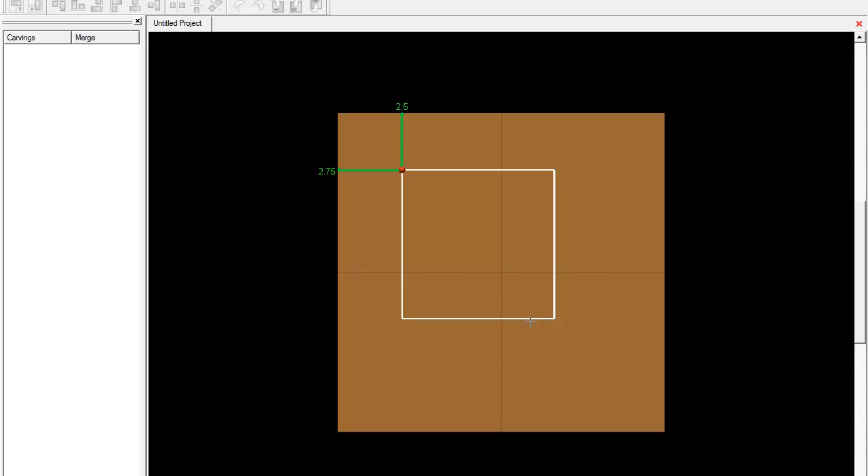The wood grain makes it easier to see if I take the wood grain off. Basically I have a square here. I'm going to come up and choose the square tool, and drag me a square here on the board, clicking somewhere in the middle and centering both directions.

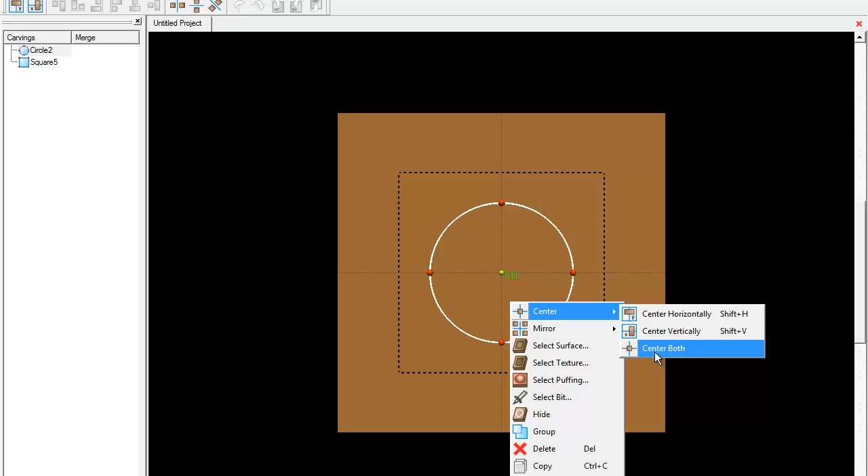Now I'm going to come back and do a circle, clicking here in the middle, pull it out to about the size I want. Here again, center it in both directions.

Coming back to the square, going to move up and do the sweep surface, and I'm in demo mode here because I do not own the software. I've got this expanded here so I can see it better. Going to enlarge it, put a grid on it so I can see the grid.

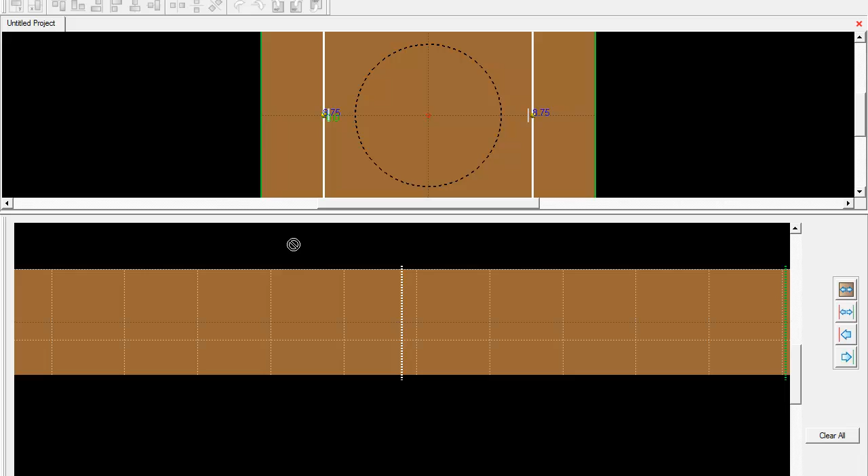Basically I'm going to use just straight lines, line segments, and draw 3 lines, going across here, up, and then up again. So I'll start with the first line, bring it out, right about there would be fine. Do another line segment.

Notice whenever I get near this node right here, this star on it, that means I'm going to connect them. I'm going to pull it out to right about here, and one more line to go up.

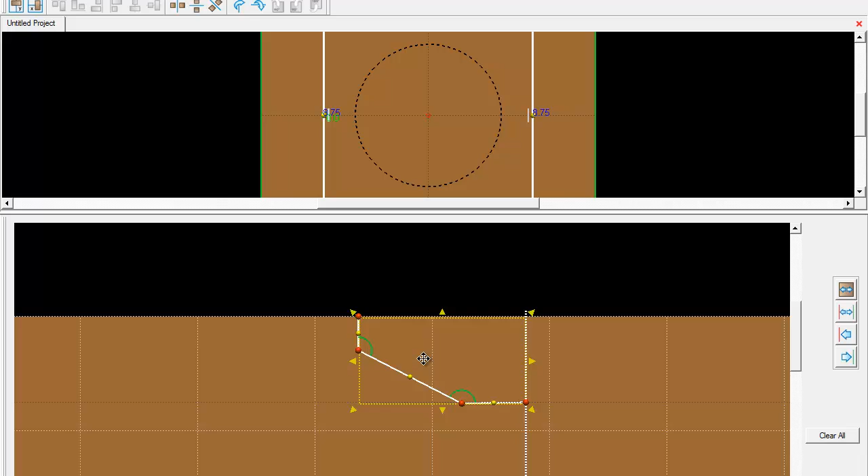Get it up close to the top of the board. Now what I find is that I have a problem with this, that it doesn't come about just right, so I may have to play with it here a little bit.

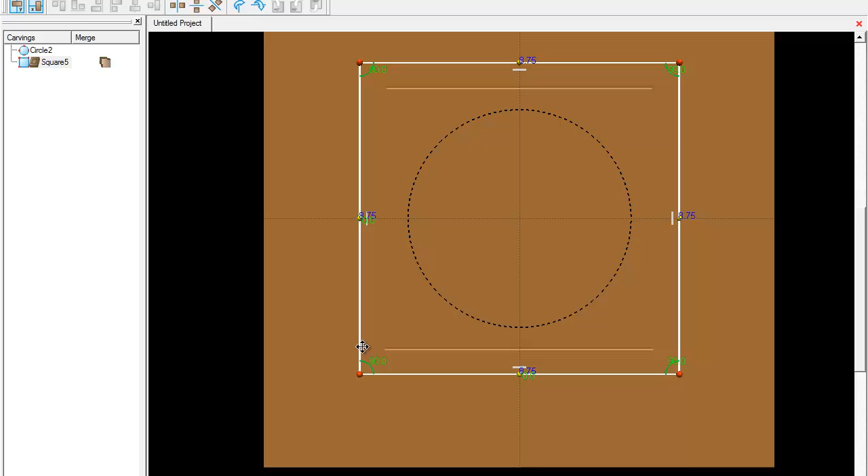See what it gave me here was a line that gave me the profile, but way inside of where I wanted it to be. Here's the line, the white line here, and just a small, maybe 1/8 of an inch.

I go back into it, turn the grid on. You can see I'm much more than even 1/2 an inch here, not just 1/8 of an inch.

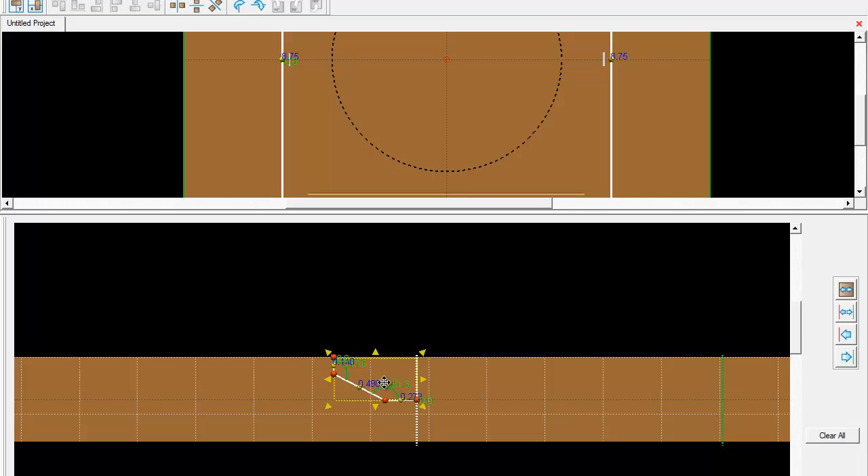What it seems to be, it has something to do with this line right here. If I make it a little bit crooked, click on OK. Now it worked. Okay, it usually takes me 3 or 4 tries to get this to come out right.

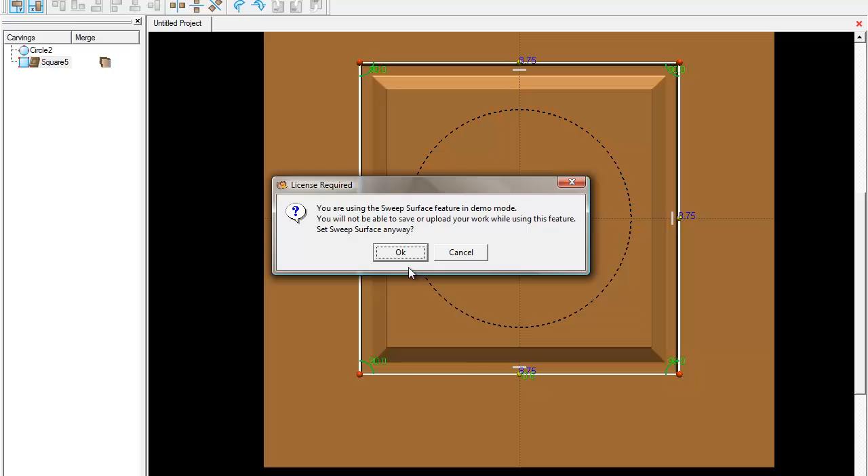Go back into it. Now I can make it the profile I want. Put my cursor on the straight line here. Right mouse click, click on Form, click on Arc.

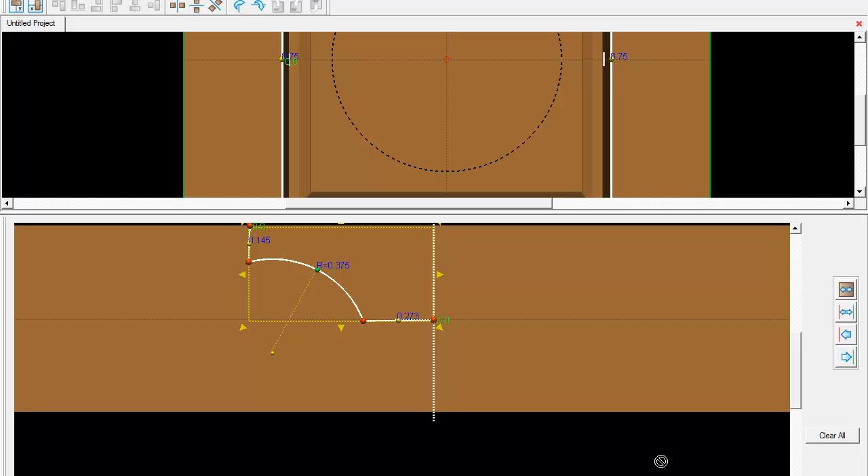And you can see I've got an arc on there now, so I'm going to bring the arc up to what I want. Now I'm going to click on OK. And there we go, we got the profile we want around the outside of the board.

The square is done, so let's move on to the circle. The circle consists of 3 inner circles and a half ball in the middle.

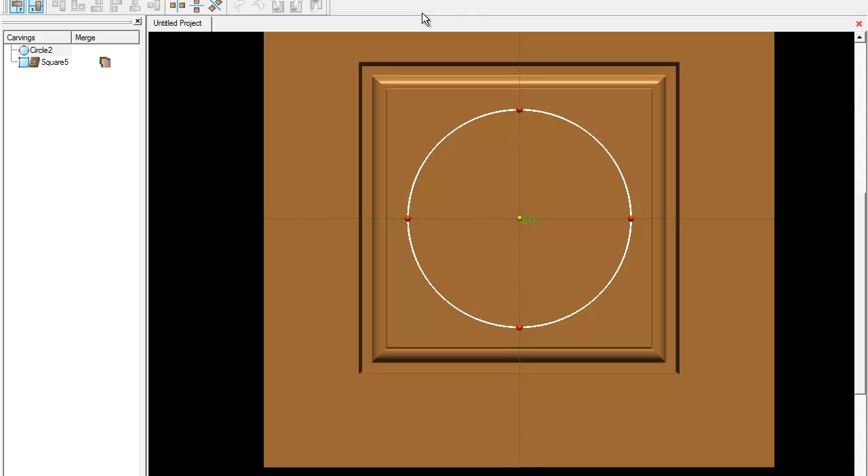For this one, I'm going to click on the sweep rounded. And here again, here's my profile here, here's my board setting, I should say. Expand it. Here's the white of the outside of the circle. Here's the center of the circle.

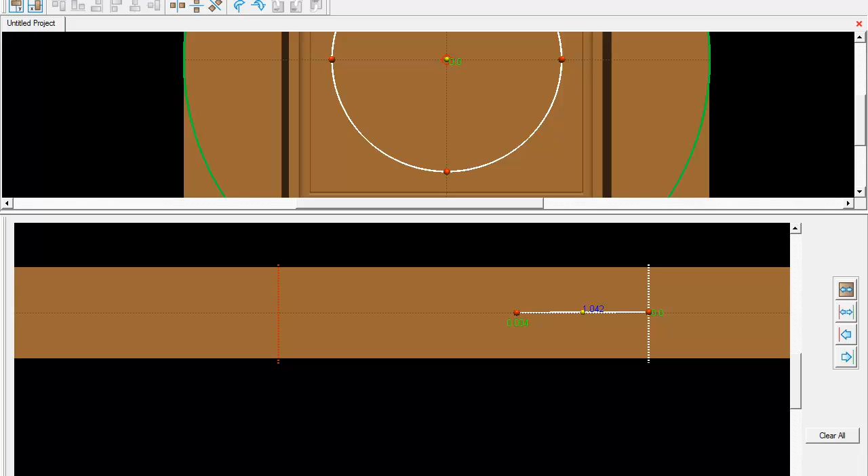Again, I'm going to use line segments. I'm going to draw 3 lines, and break this section up here into 3 sections, making sure I connect each one of them.

Okay, that one's, let me extend this one. Now they're both about the same size.

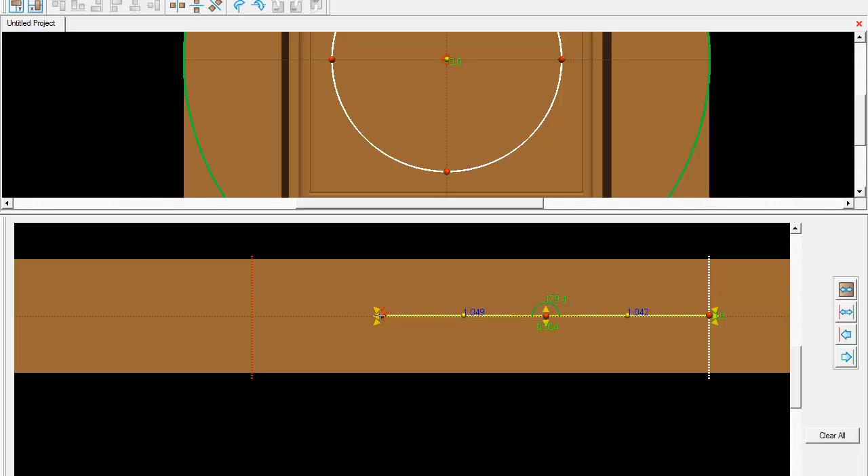Okay, now let's do another line segment, and again, connected line, and this time I'm going to go to the top of the board, right there. With the 3 lines drawn, I'm going to come back to the first one.

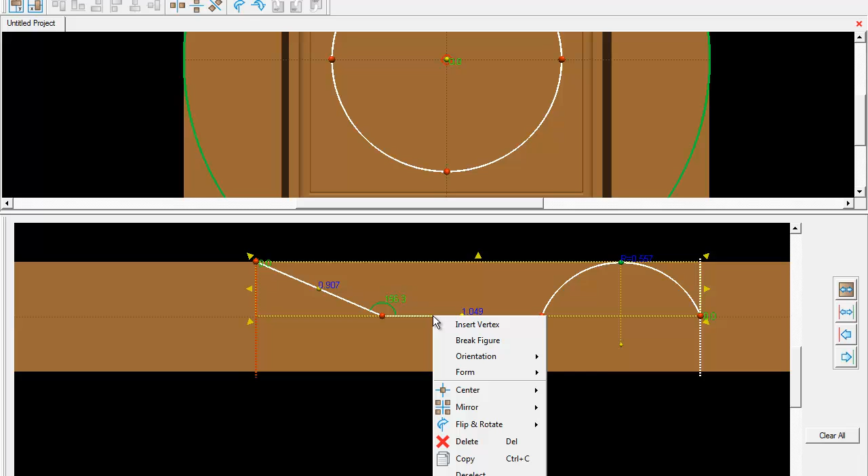Right mouse click on it, click on Form and Arc, and I'm going to pull that arc up to the top of the board. Second line, right mouse click on Form and Arc, and I'm going to draw that one up to the top of the board. The third line, right mouse click on it, Form, Arc, and I'm going to bring it up.

Now here I'm going to zoom in to make sure I don't go above the top of the board here. It looks pretty good. I'm going to click on OK.